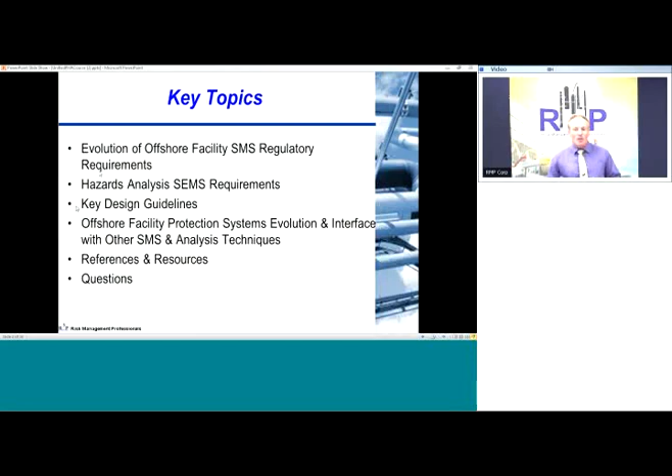So let's talk first about why we're here in general. Why do we have safety systems and safety programs in the first place? Let's look at offshore facilities and how various safety management systems regulatory requirements have evolved. First of all, there have been a lot of tragedies that remind us of why these programs exist. It also emphasizes the importance of our jobs as safety professionals. Accidents have happened.

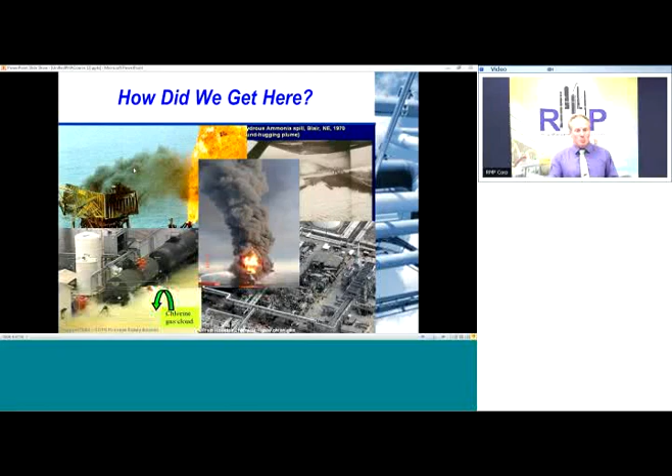They've driven industry and agency response, both from a programmatic perspective and also from a design guideline and safety systems evolution perspective. When you look at all these major accidents, they've caused significant loss of life and property, as well as other related costs.

They've had relatively simple precursors in many cases, and in all cases the root cause was a failure to maintain its design intent. There was a design basis for what that system was going to do, and somehow, either through not identifying hazards, mechanical integrity problems, or other issues, the design intent was not maintained.

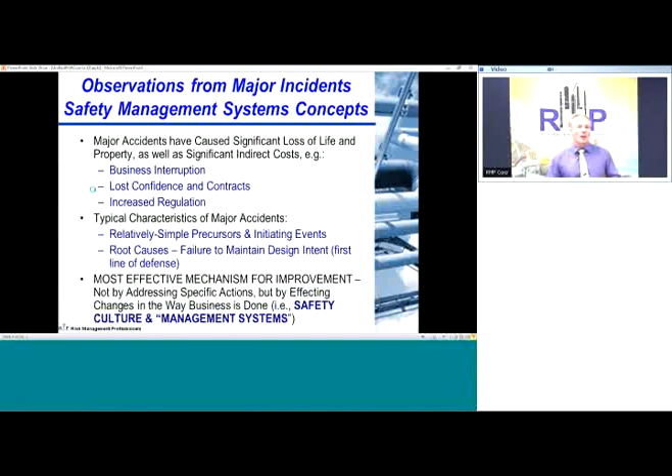So when you dig down to these root causes, it's really safety culture and management systems that were your key solution to these. When you look, what I think is very interesting, I've been involved in this business since the Bhopal event in the early 80s, and I was part of the technical steering committee on the Center for Chemical Process Safety that responded to that.

It's really interesting to me when you look on a timeline for the overall evolution of all these safety management systems. When you look at onshore facilities after the Bhopal tragedy in 1984, the Center for Chemical Process Safety was formed, and industry had a really good initial response. One of the first things we developed was guidelines on technical management of these safety systems.

The API put out recommended practice 750. The regulators came on board with process safety management that you're all familiar with, but it was a real hard emphasis on onshore facilities. It was a really good response, first by industry and then by agencies in terms of addressing this. When you look at offshore facilities, a key catalyst was the Piper Alpha accident.

Industry also was trying to address how do you look at some of these high-end safety systems. I'll talk to you more about the platform safety shutdown system study that we did in 1989. But SEMP, API recommended practice 75, early concepts for SEMS, all those came about focused on offshore facilities in the United States.

In parallel, because Piper Alpha was in UK waters, the United Kingdom came up with safety cases, and a key element of that was also safety management systems. So when you look at both onshore and offshore, domestic and international, domestic being the United States, a lot of the where it happened, when it happened, triggered the kind of response that you got both to address onshore and offshore facilities.

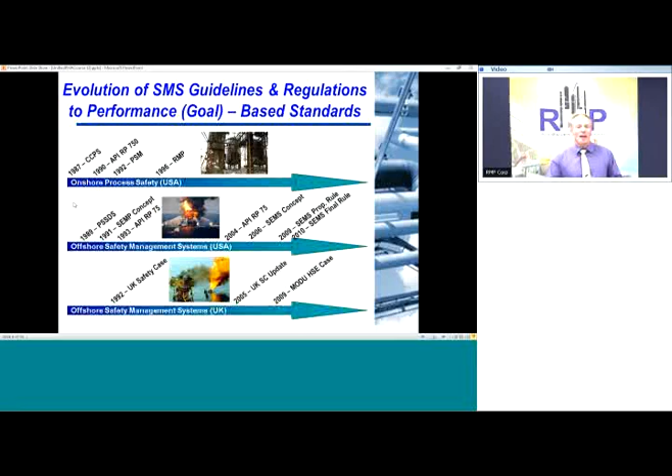So where are we at right now? What we've got is Safety and Environmental Management Systems, or SEMS program, that's been promulgated by BSEE, previously BOEMRE, and it includes a lot of the same technical management or safety management system elements that have existed since the mid-'80s when the CCPS first put out its technical management guidelines.

Safety and environmental information, hazards analysis, management of change, operating procedures have all been a fundamental platform for addressing safety management systems. In fact, the items in red, hazards analysis, MOC, operating procedures, and mechanical integrity, were things that have been recognized as very important elements, also things that get folks into a lot of trouble, and were a core part of the initial

regulation that was taking the more important elements from SEMP and an early version of SEMS before the recent promulgation in 2010. Also in orange, contractors, employee participation, and auditing are things that are still evolving with respect to these SEMS programs. SEMS 2 is on the near horizon, and it's going to put a lot more emphasis on these three elements, and that's why I put it in orange.

Not a requirement yet, or at least not the last time I checked the BSEE website, which was within the past 48 hours, but it is something that's on the near horizon for taking care of.

So a fundamental element of all these safety management systems has always been hazards analysis. That's a key element of SEMS, process safety management, risk management programs, safety cases. All those realize that you have to identify your hazards if you're trying to control them.

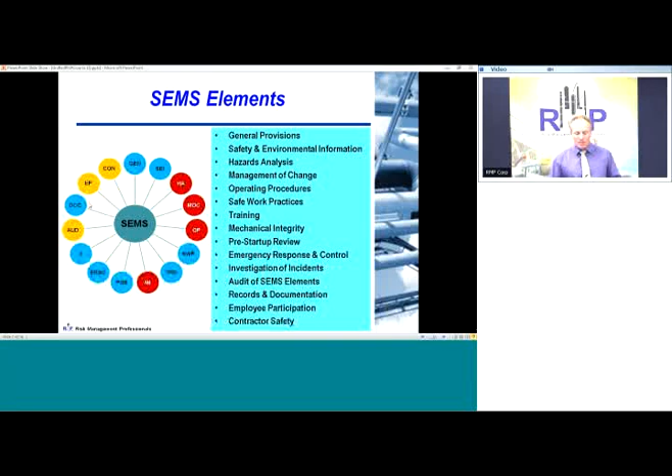So let's quickly review the SEMS hazards analysis requirements. I'm providing this primarily for reference. I just want you to, because I'll be linking to this in terms of establishing an effective program as we go through our presentation.

Okay, good. Some general clarifications. Something to keep in mind is there's two general types of hazards analysis requirements: a facility level hazards analysis, which most people address with classic techniques such as what-if checklist and HAZOP studies, and also a job safety analysis, which a lot of people address prior to the start of a specific operation, but is more task-oriented.

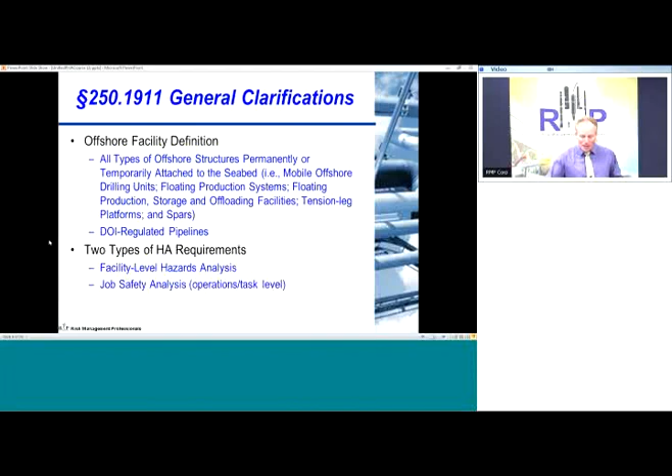We'll be focusing mostly on facility-level hazards analysis for our discussion today. What we're trying to do is show how you can blend some of the tools, even the ones that address the high-order safety systems, into your program so you can easily keep it up to date for all the periodic update requirements you've got to do at 3-year intervals for your SEMS program.

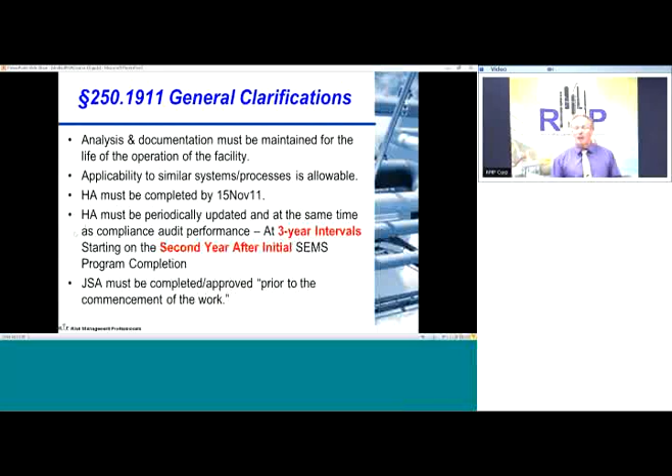Another thing to keep in mind is that these facility level hazards analysis techniques must be appropriate to the complexity of the operation and must identify, evaluate, and manage the hazards involved in the operation.

The reason why I read through that quotation from the regs is what we're going to be doing is looking at various tools that are designed to address high-end safety systems that sometimes you don't get the full flavor or understanding of from the classic qualitative techniques such as HAZOP and what-if checklist.

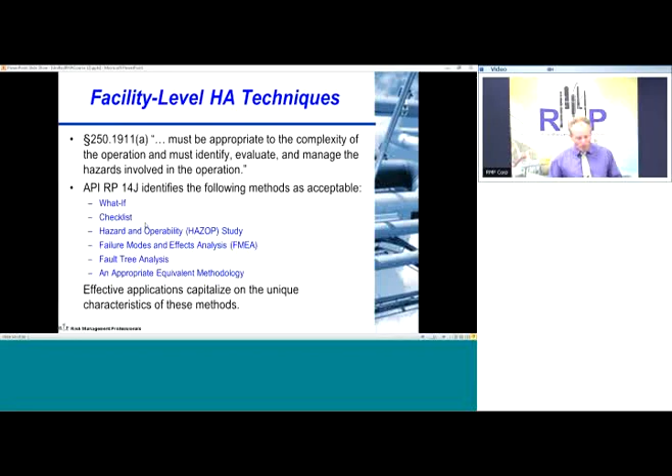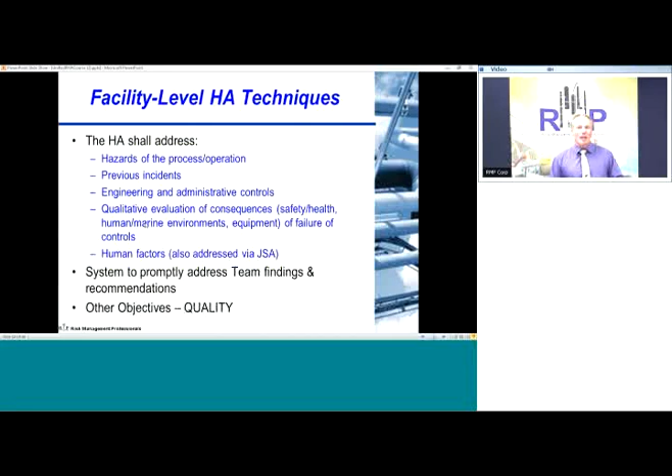The hazards analysis has to look at hazards, previous incidents, human factors issues. All those things are part of the framework we're going to be talking about that you can use to evaluate the high-end systems. Whereas the facility level hazards analysis focuses on a team approach, a lot of these supplemental analysis activities can fold into that team activity and also may require supplemental analysis.

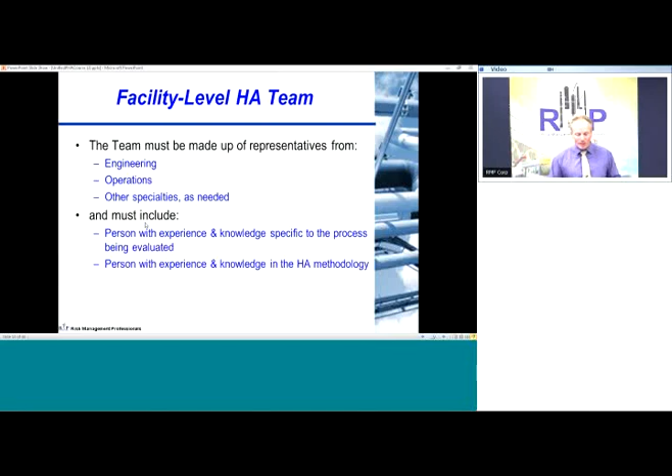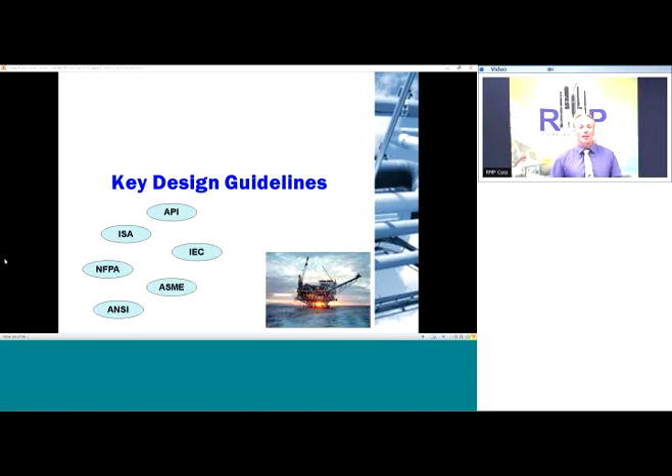So we've discussed these various SEMS requirements that provide that hazards analysis framework. Let's take a quick look at a couple of key design guidelines. Some of the ones you'll want to be familiar with for the evaluation of higher order safety systems, well, just safety systems in general, are API recommended practice 14C and 14J.

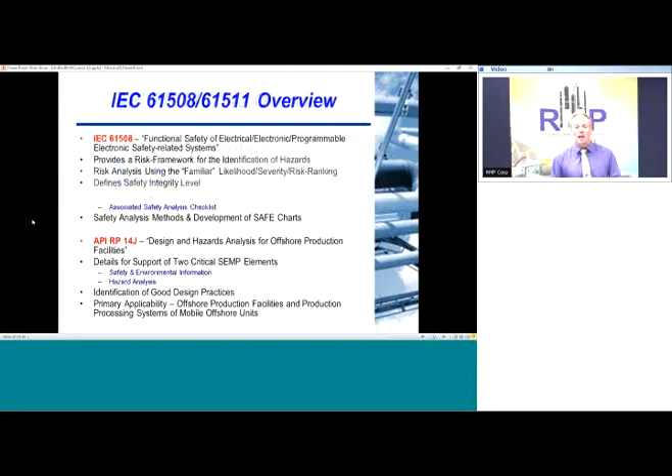14C, most of you are familiar with the fact that it provides reference points, examples, analysis techniques, and ways that you can look at, use your process flow diagrams, P&IDs, and translate that into making sure that you've got the appropriate level of safety. It references recommended practice 14J that gets more into the tools and how you apply those analysis tools to the analysis activities that are displayed and detailed in 14C.

14C has been around since the 80s, and it's been updated. I think we're in the 7th edition right now. It's been updated many times to provide that framework for hazards analysis. As safety systems have evolved and we're more into electronic systems and very high-end, high-reliability systems, industry realized that there was a need for other standards to help address those particular items.

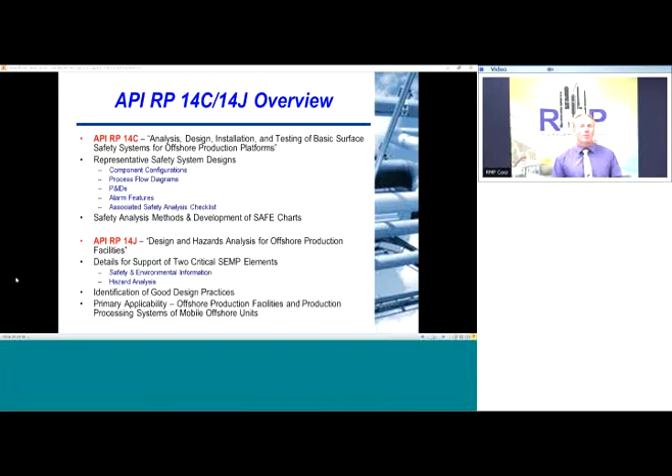IEC 61508 and 511 are two key things that you want to be familiar with. 61508 provides a framework for identifying hazards, identifying reliability targets, how you set up acceptable risk levels, etc., and defines something called a safety integrity level.

SIL, or safety integrity level, is a key measure of the effectiveness of a safety system. It's a measure of reliability and also architecture, which are fundamental aspects of how that safety system functions and how it will do its job.

Functional safety, safety instrument systems for the process industry sector was promulgated or put together later on, 61511, and its focus was on safety instrumented systems. A lot of you guys know it as SIS systems.

These are things that have higher end electronics, higher end logic solvers. They're trying to do more. They're trying to put more intelligence into your safety system to improve reliability, to improve effectiveness. Its primary applicability is for the process industries, and key elements are identifying requirements, application guidelines, and SIL determination.

One of the key things also mentioned in this, even though it's a standard primarily designed to help people who are designing and evaluating these kind of safety systems - I'm going to read a quotation here - the SIS management system should define how an owner-operator intends to assess, design, engineer, verify, install, commission, validate, operate, maintain, and continuously improve their safety instrumented system.

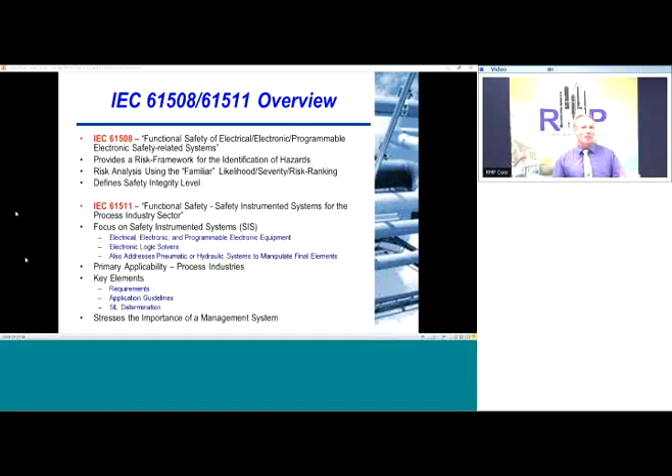So we discussed the general hazards analysis requirements. We've discussed general design guidelines. The design guidelines are very helpful, but let's take a look at and understand a little bit better the evolution of these protection systems and also their interface with other safety management systems and analysis techniques.

What we're trying to do in all these cases, the SEMP program, hazards analysis, designing safety systems, is really taking an unacceptable level of risk, which you want to measure as a function of frequency and severity. Obviously, something of high frequency may not be all that important if it's low severity, and something of high severity may not be all that important if it's low frequency.

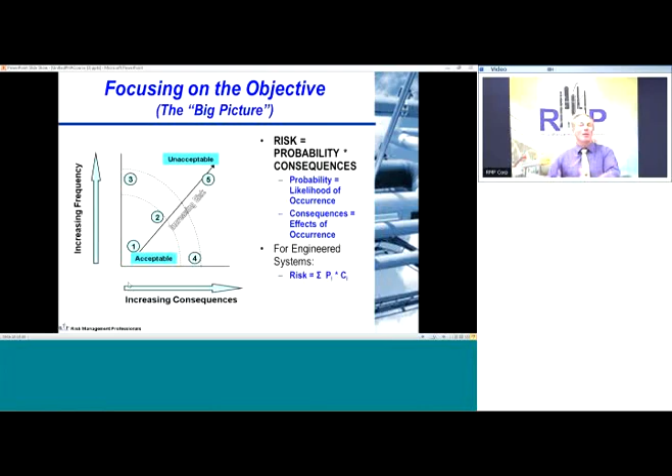Putting those together, you get an understanding of importance and can feed that back into whether your safety system is adequate, the levels of protection and various safety systems that apply to the scenarios you're looking at, or whether you're doing too much. I've seen a lot of cases where people over-apply very high-end, expensive safety systems in the design phase, and not only does that make design and installation more expensive, but often the engineering contractors pulling this together aren't thinking about all the work involved by operations and maintenance staff to keep these things going and test them properly.

So just to put this in perspective, that same balance of severity and frequency is something you often see in a risk ranking matrix. I put this up just as a reference point, and hopefully a link to familiarity for a lot of you.

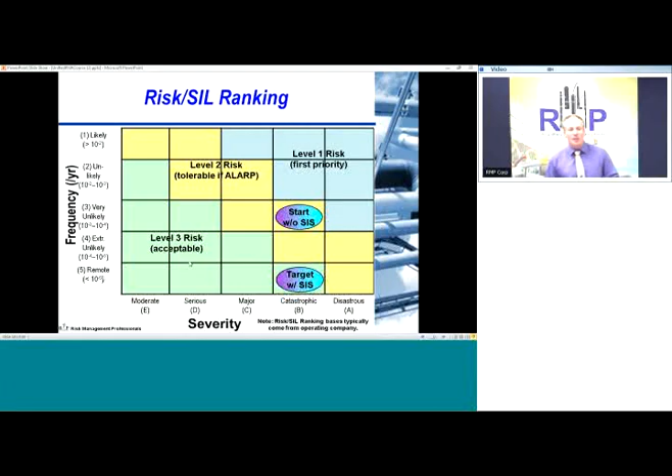When you look at the evolutionary history of safety systems, the past couple of decades have been an exciting time in terms of design mode and where these systems have gone. A couple of decades ago, we had primarily analog devices, single element, single function, pretty easy to understand. As electronics progressed, you've seen a lot of evolution in terms of signal processing, application of voting logic, and right now a lot of feedback loops that go from the end device back into the logic solver to help it understand if those end devices are working properly.

Along with that evolution in hardware, we've also had to have an evolution in how we look at whether these things are effective, basically your analysis techniques. API RP 14C, as I mentioned, has been around for a while, a really cornerstone document that has provided a lot of good guidance and has bumped up the level of safety for the offshore industry and other industries that may have applied it, and been a super help. The first edition came out in 1986.

Since then, the evolution of architecture has changed, and with that, a lot of people have been wondering how to apply it. I was fortunate enough in 1989 to be part of an offshore process safety shutdown system effectiveness study, where we looked at what were new technologies at the time and tried to put into perspective three levels of platform: a level 3 system in Statfjord - Solveig will probably correct my pronunciation later - a level 2 facility in the Gulf of Mexico, and also level 1 offshore Nigeria. We looked at the application of these devices, where it made sense and where it didn't.

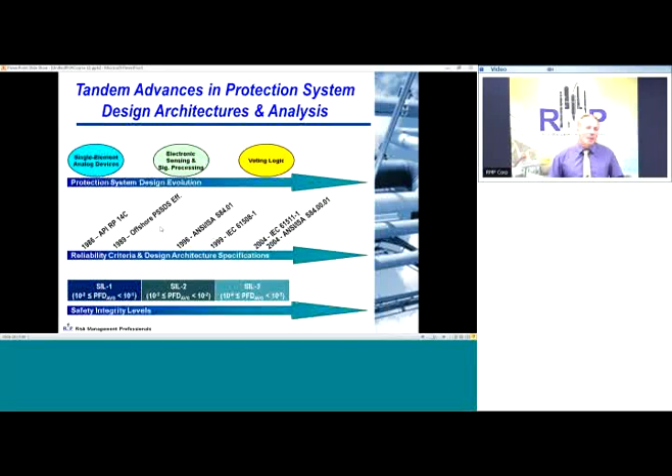As these things have evolved, so has their reliability and architecture to help that effectiveness - SIL 1, SIL 2, SIL 3 being the most complex and reliable type of system for providing the degree of safety you want. One thing to keep in mind is that even with these high-end safety systems and a lot of evolution over the past couple of decades, one of the nice things in recent years is that the advent of consumer electronics has meant a lot of these systems are becoming less expensive and more readily applicable to different environments and applications.

But recognize that all these single analog systems, early electronics, even with a lot of the new stuff which has voting logic and feedback on end devices - all these are part of a spectrum of safety systems that is conducive towards making your facility safer. And proper application of these is what we're really talking about here.

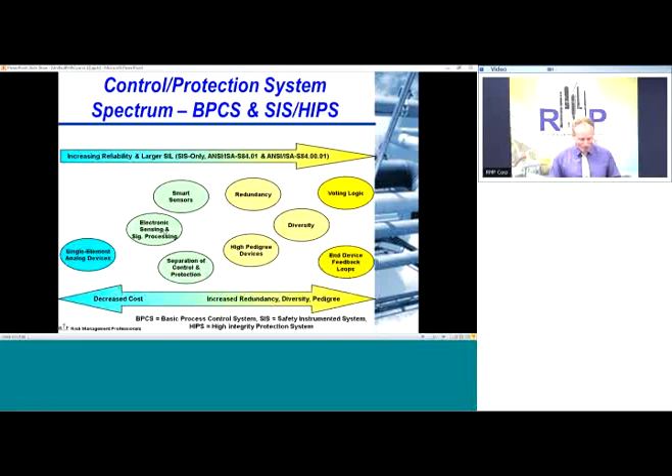Defining a safety instrumented system, the whole idea is to apply diversity, redundancy, and separation to achieve the effectiveness of that system, to give you that low probability of failure on demand. You've probably heard this term a lot, PFD, which allows you to characterize how reliable that's going to be in response to the emergency or upset condition it's designed for.

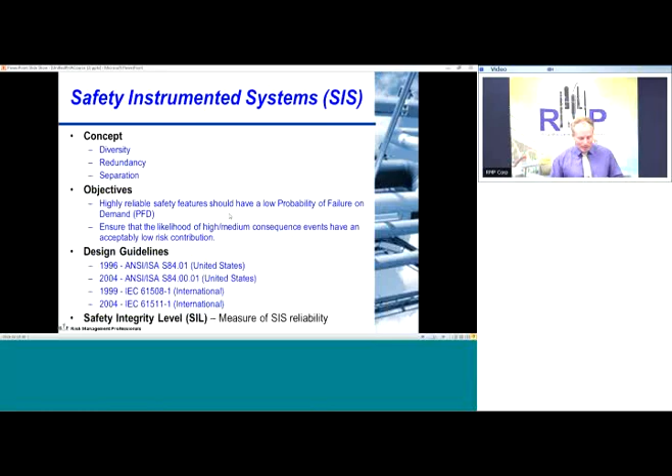The design guidelines are listed here, and I've identified safety integrity level as a measure of SIS reliability. So how do you evaluate SIS's effectiveness?

One tool is layer of protection analysis, or LOPA. It was really a wonderful bridge. Part of my early career was in quantitative risk assessment, and then I've been doing HAZOP studies since 1986.

LOPA is a wonderful bridge between the two. It applies quantitative techniques, but at a fairly simple order of magnitude level, to give you the ability to make most of your decisions fairly easily, without burdening you with all the details of very detailed quantitative risk assessment.

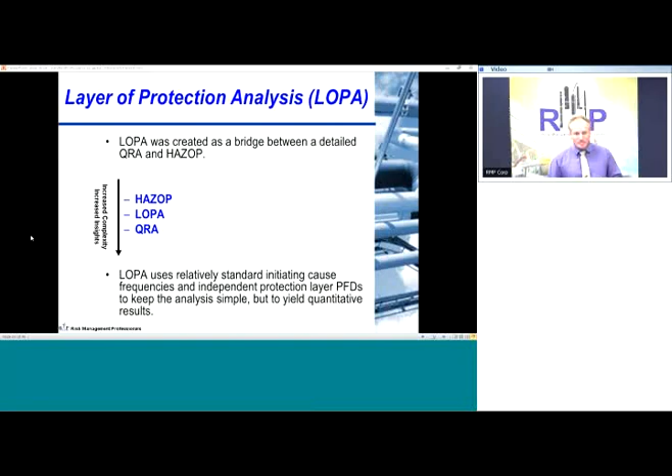A key part of LOPA is understanding your scenario, just like all these hazards analysis techniques - understanding the initiating cause, understanding how bad it is. There are a lot of ways to do layer of protection analysis, but one of the more common is for a certain severity event to establish a target frequency that you don't want to exceed.

For example, if an event could result in a severe injury or fatality, you don't want the frequency of events that can lead up to that to exceed a certain level. You want to keep them below a certain amount.

So what they've defined is a LOPA ratio that compares that target frequency with the actual frequency of the event, which involves the likelihood of the initiating cause and the probability of failure on demand of various systems. If your likelihood of getting to that consequence is greater than that target frequency, you've got a LOPA ratio less than 1. That's typically undesirable.

The level of undesirability feeds back into additional safety systems that you want. I'm sorry if this sounds complicated - that's why we got this printed out. For those of you who are not used to dealing with probabilities or LOPA calculations, it's a little tough, but if you do it enough, you'll get used to it.

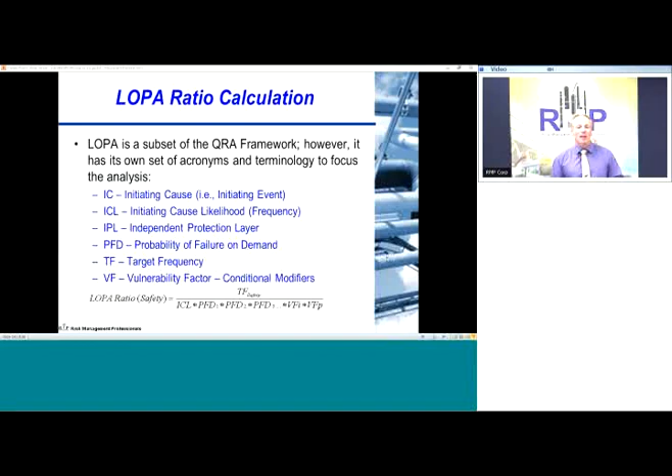Okay, so how do you use the LOPA results? A lot of the time in the design process, you want to keep that LOPA ratio greater than 1. Well, it doesn't have to be by adding a very expensive high-end safety instrumented system.

That's certainly one way to do it, but as I mentioned, you've also got that spectrum of protection features - a whole lot of off-the-shelf, tried and true analog devices, maybe even human intervention - a lot of things that contribute to not reaching that undesirable consequence.

Those also come into play, and in a lot of cases, you might argue that having one very high-end, high-pedigree, high-reliability safety instrumented system may achieve a design target, but if you've got a number of diverse, different types of analog protection features, people that can get involved, and other things - if you've got enough diversity, there's an argument that diversity is also a real good thing to have.

Anyhow, from a design perspective, when you look at those LOPA ratios, the lower the ratio, or the more less than 1 it is, means you've got to have a higher-end protection feature installed such that it provides you with the level of safety that you want. And that's what the SIL level is.

Usually the LOPA ratio is used to calculate the SIL level for the safety instrumented system that you want to apply.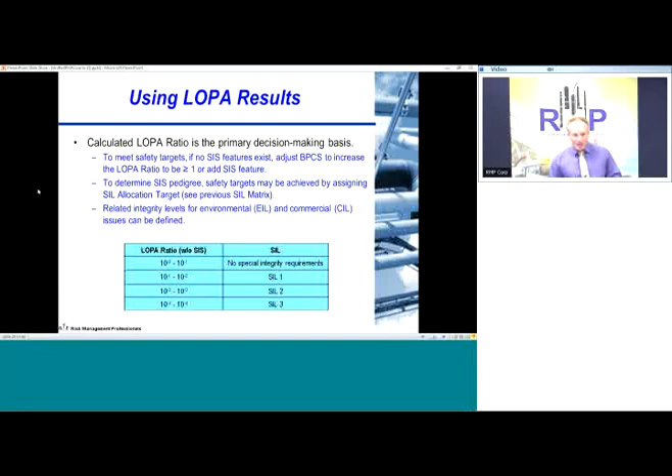Just to summarize really quick - you've got to determine if your risk targets are met. That's part of what the layer protection analysis does. It helps you identify if you need a basic process control system, a safety instrumented system, or a high integrity protection system feature to be added.

If you're looking at several different features, as I alluded to a few minutes ago, you can compare the benefit and cost associated with those improvements, and then identify how you can most easily reach those risk targets.

And again, don't forget the tried and true basic process control systems, or even off-the-shelf standard protection systems that have been around for decades. They do provide protection and shouldn't be ignored in lieu of these new, sexy safety instrumented systems that a lot of people want to apply.

As I mentioned before, when you start using layer protection analysis, a lot of times it shows you that perhaps you've over-applied a lot of very high-end and very expensive systems. Although LOPA is calculation intensive and often done separately, it can be really good to involve directly with the team as you're doing a HAZOP study or some other facility level hazards analysis. More often than not, it can be done fairly quickly while the team understands the scenario, and it reinforces their understanding, giving good insights because the team is already warmed up.

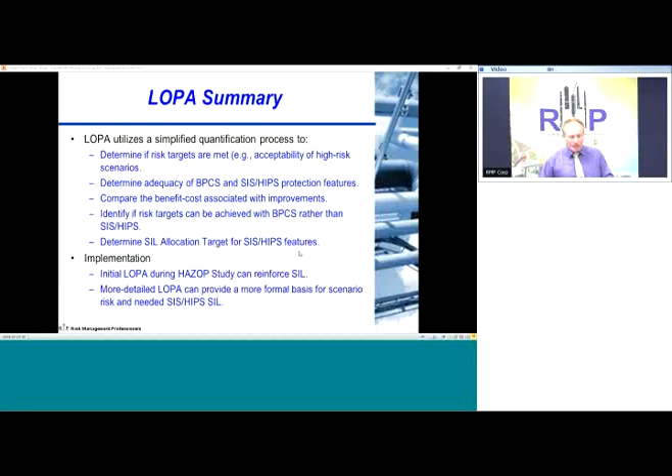Now the next two slides, I'm running a little behind on time, so I'm going to skip those. There's a printout example provided, and you're also welcome to call if you have any questions.

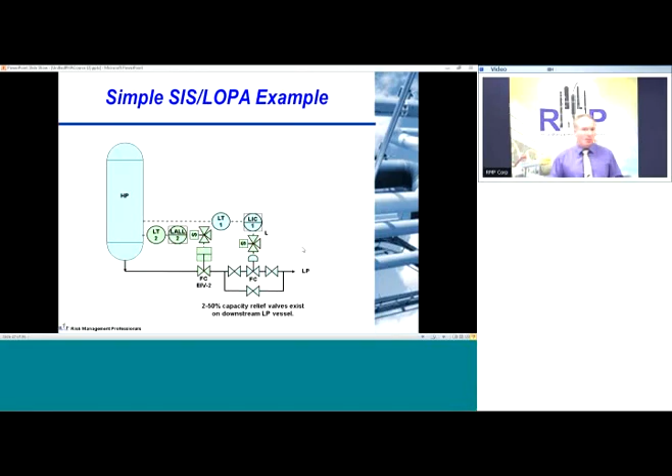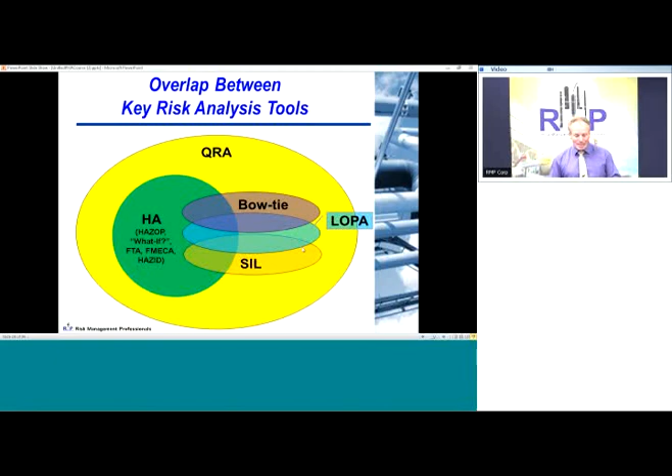One thing I also want you to realize is that as offshore facilities operate in deeper waters, higher pressures, more extreme environments, we're pushing the limits on engineering and technology. Since we're pushing the limits, this requires higher pedigree safety systems to manage this increased potential for risk. We've been doing that for decades, using higher-end protection systems that provide an additional level of safety to push the engineering limits even further.

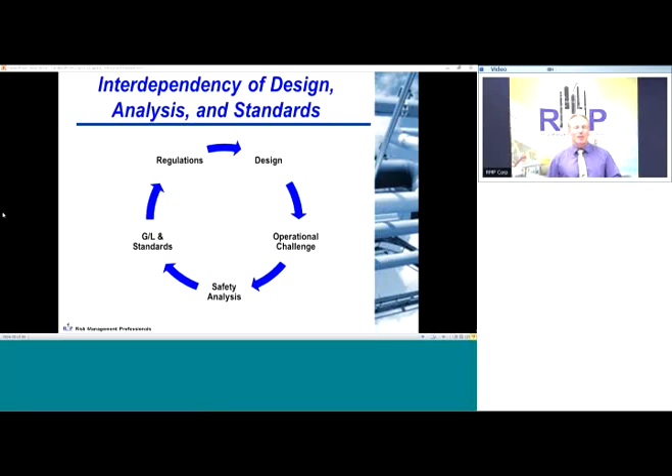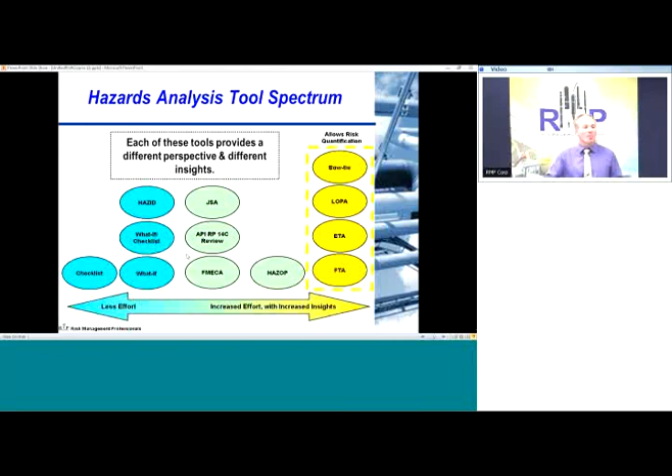So anyhow, I hope you got a little bit of background on LOPA today. You can see how it can fold into the overall evaluation of your systems, especially safety instrumented systems and HIPs, and I hope you can see how it can easily fold into your overall SEMS program. What I'd like to do right now, as we're drawing this to a close, is open it up for question and answer in just a couple minutes.